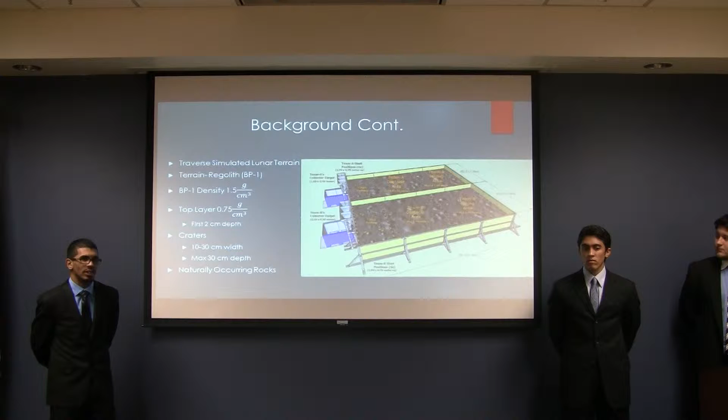Here is the schematic of the terrain in which we will compete. Two teams will compete simultaneously. Craters will be randomly scattered, with a max depth of 30 centimeters.

Some of the design considerations we took into account when designing the rover were the mobility system, whether we wanted to use wheels, treads, legs, or a hybrid of any two. Also the collection mechanism, whether we wanted a scoop design or a continuously operating conveyor belt design, as well as the deposit mechanism, how we would transfer the collected regolith into the depositing bins located on the field. And also our control systems, whether we wanted to use sensors, cameras, or any combination, as well as how they would adhere to the data transmission limitations.

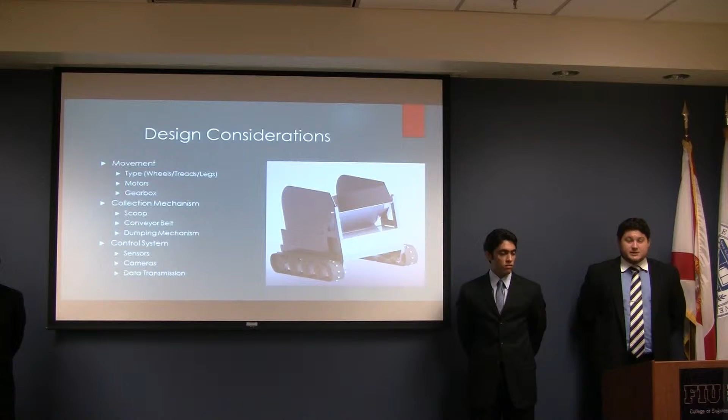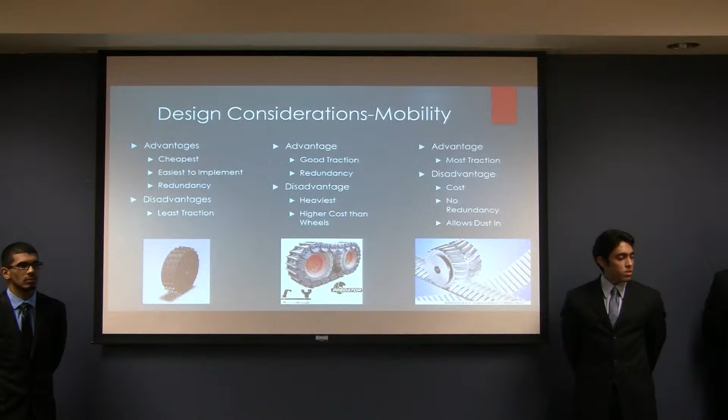To move our rover, we considered a couple of different mobility systems. The first were wheels - cheapest and easiest to implement, but giving the least amount of traction. We then considered adding lugs to the wheels to add traction, but that would increase weight and cost. Ultimately, we decided to go with a track system, which is the most expensive and allows some dust into the system, but gives us the most traction.

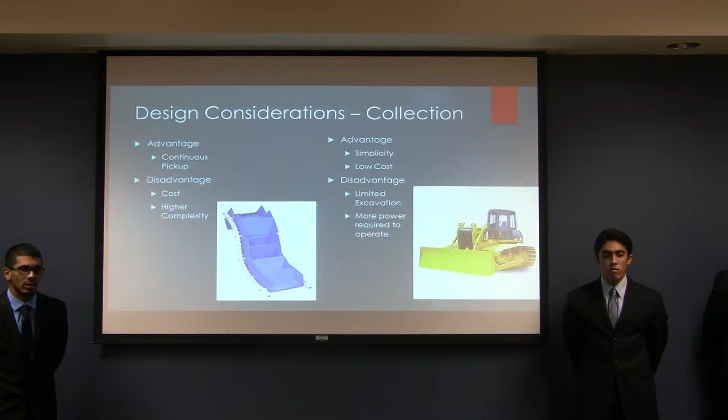For the collection mechanism, we had two options. First, a conveyor belt system - this has a higher cost, but the advantage of continuous pickup. The next is a scoop system, which has a lower cost but requires more power and has a limited capacity.

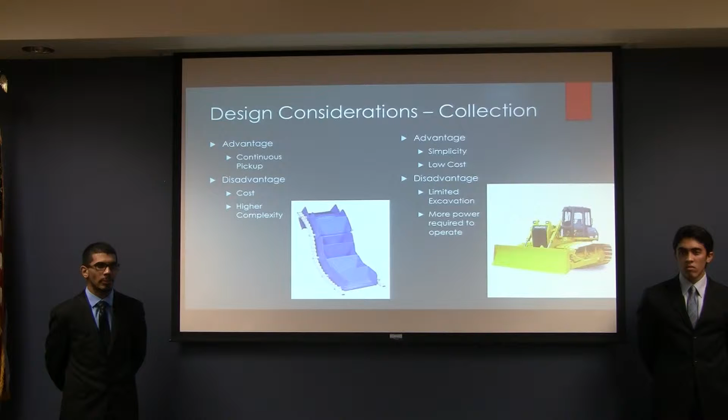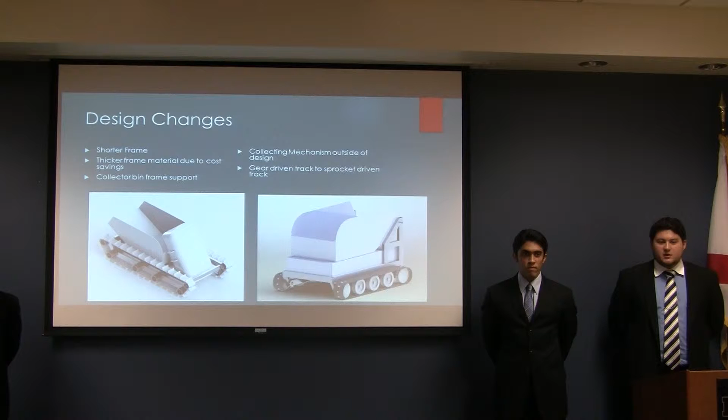Some of the design changes we made from our initial design to our current design: we shortened the frame length by roughly 12 inches overall, and switched to a thicker frame material, from 16th inch wall to 8th inch wall 6061 2x1 box aluminum. We added a support frame for the collection bin, and moved the collection mechanism outside the footprint of the rover. We also switched from gear-driven output shafts on the mobility system to sprocket-driven.

Finally, we switched from individually sealed and enclosed gearboxes and motors to an open design. This will allow us to incorporate them all in a single enclosure, so we can service the rover more easily in case any mechanical failures occur.

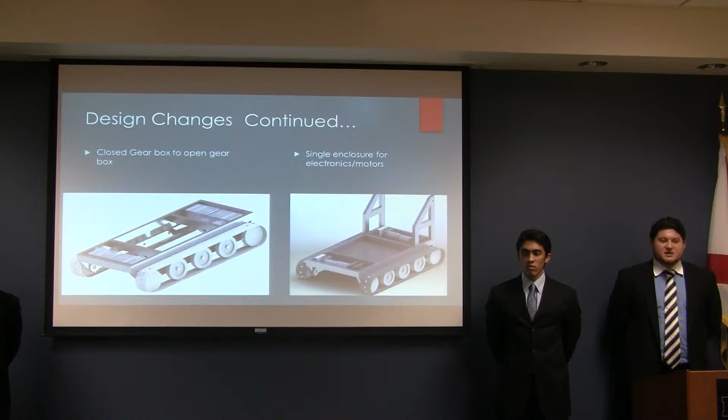Using SolidWorks, we ran a static loading test on the base of our frame. We applied a load of 1,200 newtons, which was our goal, and used the von Mises stress criterion. The simulation gave us a factor of safety of 9.9.

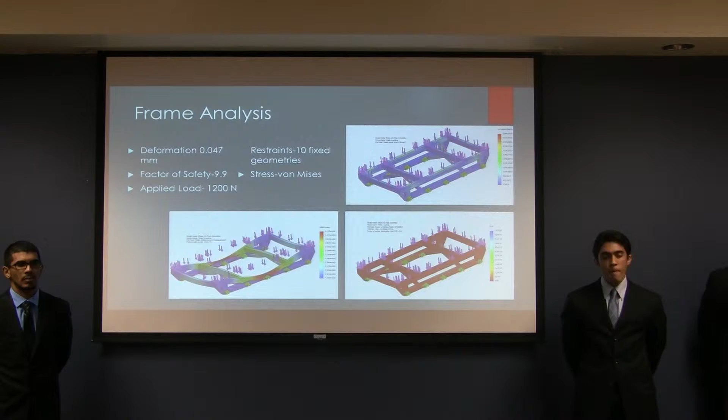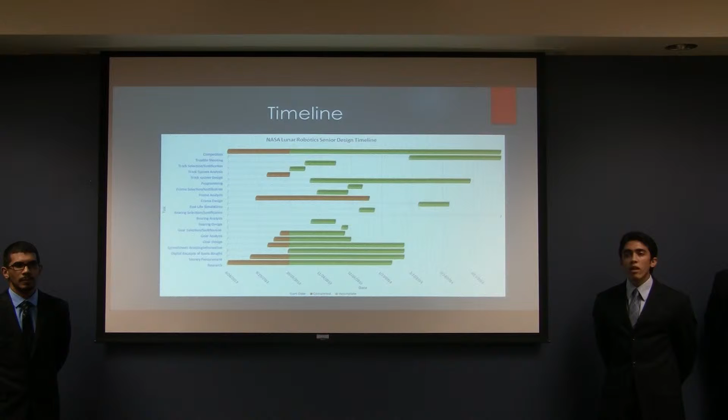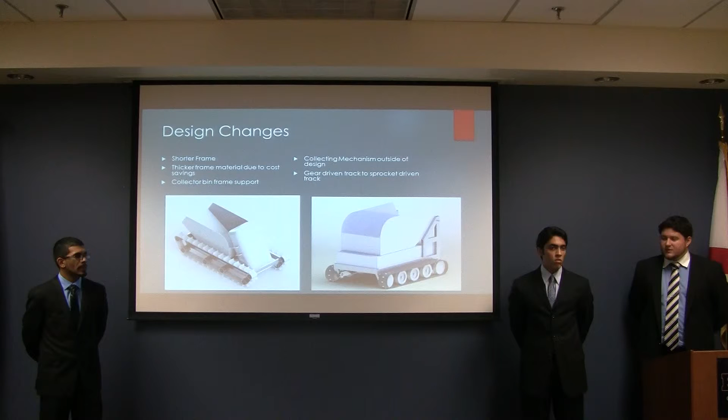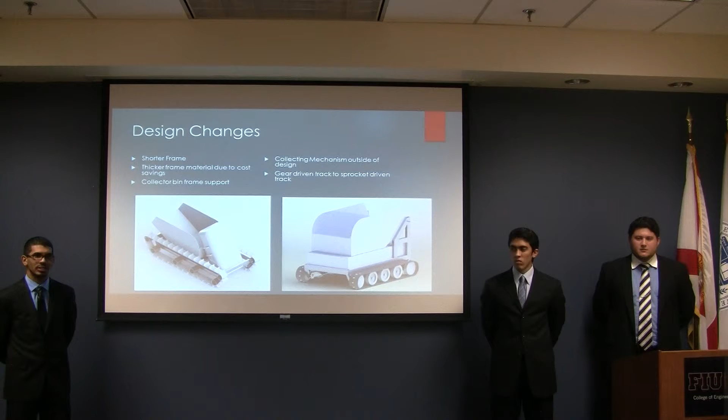Based on what failure, and what criterion did you use for selection for the replacement material? The major criterion actually was the availability of the material. We were having a hard time finding the 16th-inch wall 2x1 box aluminum, and the cost is significantly lower switching to the 8th-inch wall. On top of that, the stress analysis we performed was with the 8th-inch wall, so it provided us with an ample factor of safety. Okay, so cost was your primary driver of switching? Right. Okay, cost is our primary design consideration.

May I ask why you put the electronics out in the back and removed it from the main portion? One second. This portion back here is going to be where all of the electronics are housed, and the gearboxes as well are going to be located in the back there. You can see this is the sprocket that the gearbox will be driving with the chain.

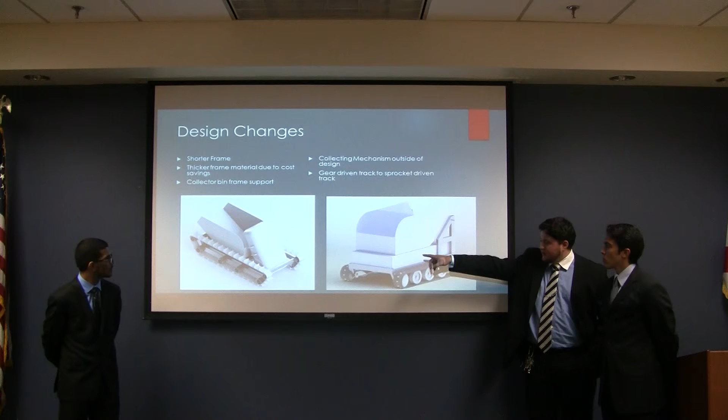On the tracks themselves, are you driving more than one of those pulleys? Originally we were planning on driving 4 of the pulleys, but then the electrical engineers informed us there would be issues obtaining adequate batteries if we drove all 4 pulleys without combining them into a single gearbox on each side. So currently we were reworking the motor calculations to see if we could drive the rover using just the 2 pulleys located in the front, based on total tractive effort calculations we obtained from University of Florida. So there'd be one on each side, basically. One drive pulley on each side, yes.

And if that drive pulley is not on the ground, if it's up in the air, is it still spinning? Well, the pulley itself is actually a sprocket-driven pulley, as opposed to a pulley and belt system, where the treads have holes located in a pattern spaced out. So the pulley is actually going through the treads, so even if that section is up in the air, it should still drive without issue.

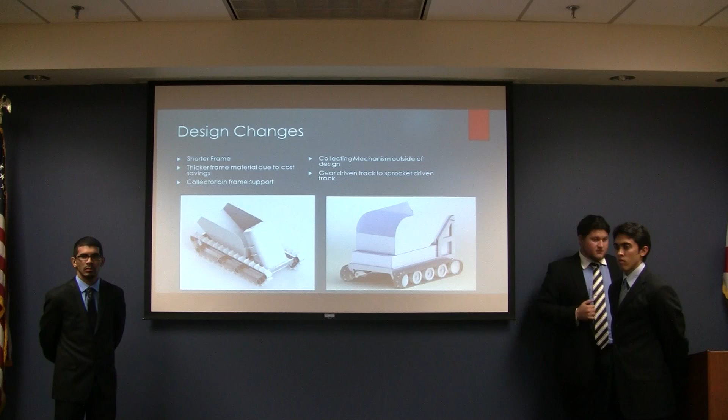Any other questions? No? All right, okay.